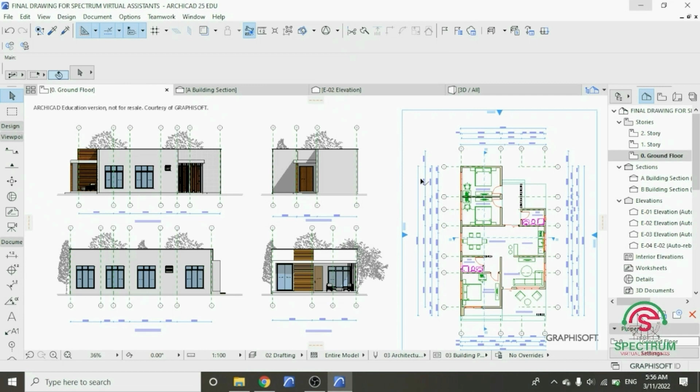Today, I'm going to show you how to draw this floor plan using ArchiCAD, and I'm going to begin with the first step, which is how to open a new project in ArchiCAD. Double click on the ArchiCAD icon, and this will appear at the top.

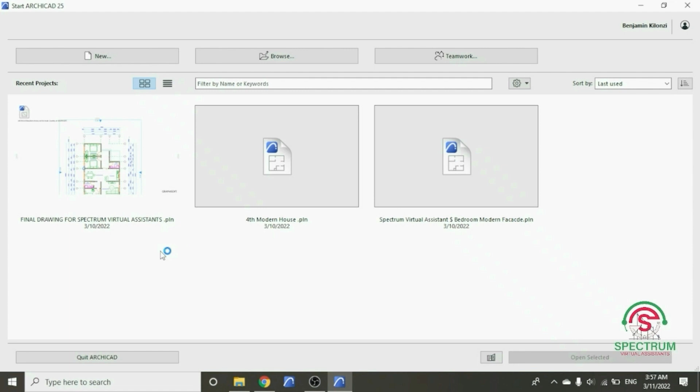Click on this part, click on New. Once you do that, this will appear. Under Template, select ArchiCAD 25 template. Under Work Environment Profile, select Default Profile and click on New. Once you do that, your workspace of the new project will appear.

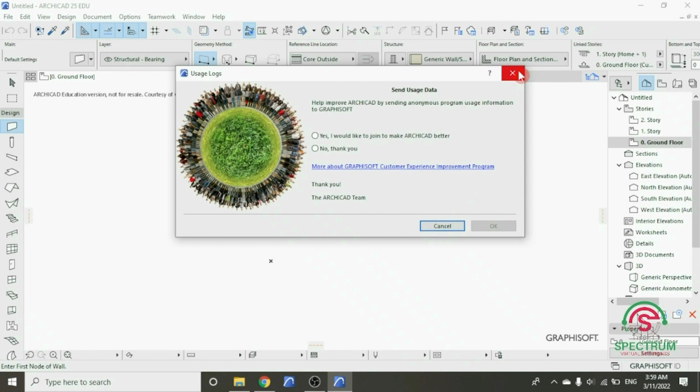Before we proceed, let's save our project and name it. Click on File, select Save As, and choose a folder to save your project in, and type in the name of your project. Once you're done typing in the name of your project, click on Save.

The next step you're going to do is enter settings for our new project. At the top, click on Options, drop down to Project Preferences, and select Working Units. Under Length Unit, select millimeter. You're going to choose 0 for the decimals. For the area unit, select square millimeter. The decimals, choose 0. The volume unit, select cubic meter.

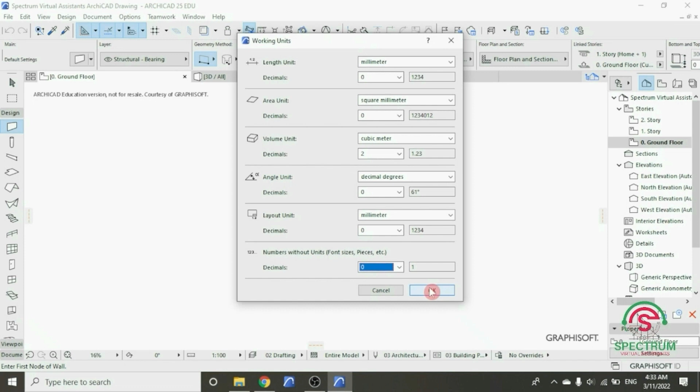For the angle unit, select that. Under layout unit, select millimeter. And for this, select 0 and click OK. Click on Options again. Drop down to Project Preferences and click on Dimensions. And this will pop up. Under Unit, select millimeter and for the decimals choose 0 and click OK.

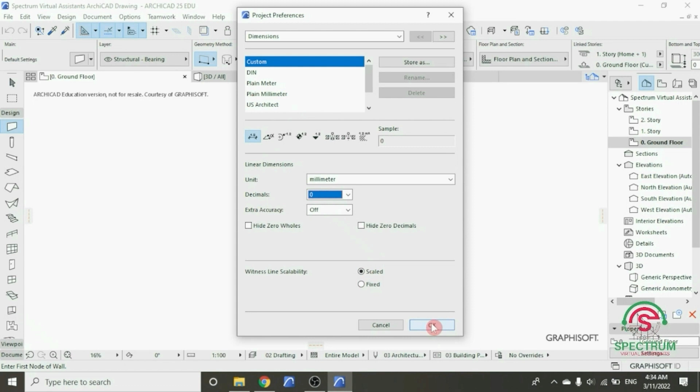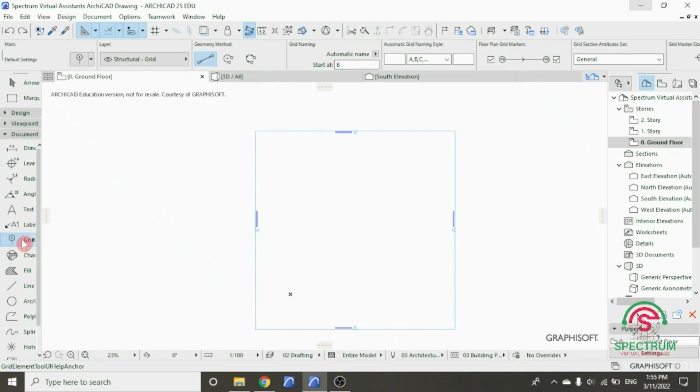Now the next step will be drawing grids of our new project. Under Documents, click on Document, drop down to Grid Element tool, double click on it, and this will pop up the Grid Element default settings. Let's begin by entering settings for the floor plan. Under this, select all stories.

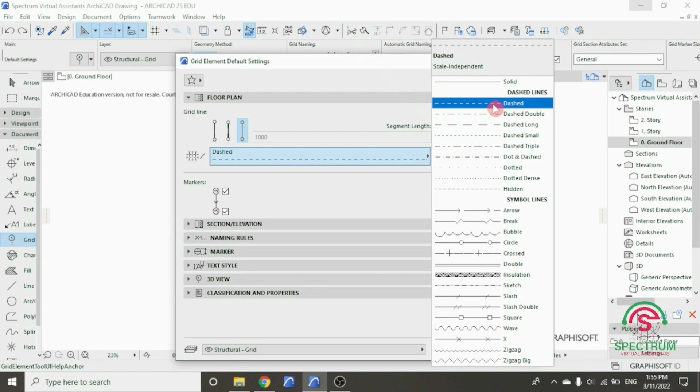For the grid line, select dashed line. Click on this part and select this color. For the markers, leave them as they are. And on this part, type 1000.

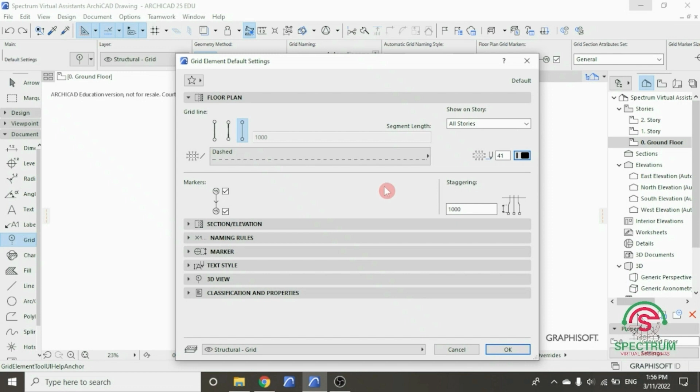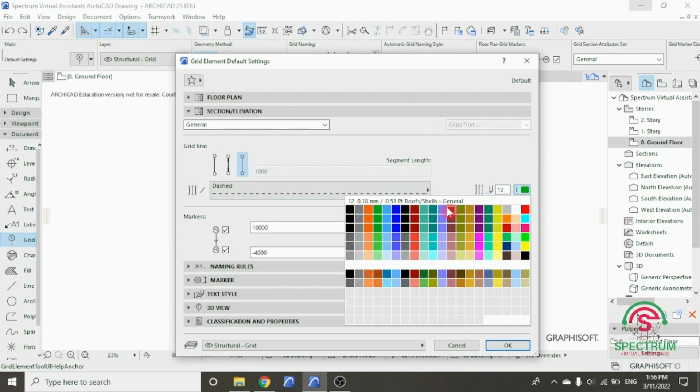Now let's enter settings for section and elevation. Click on General. For the grid line, select dashed and click on this color. For the markers, type 10000 millimeters, and for this type negative 4000 millimeters.

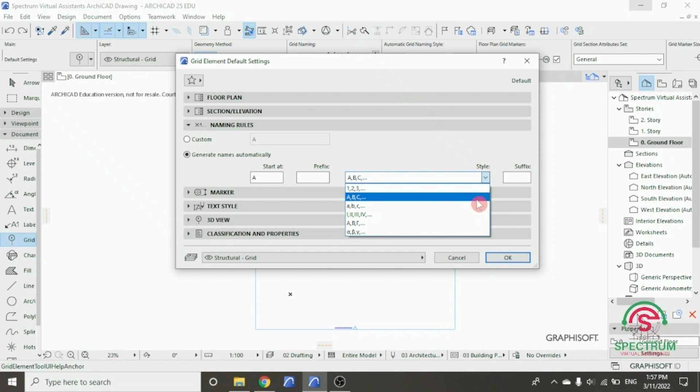Let's enter settings for naming rules. Click on Generate Names. Start at A, and for the style, choose this. For the marker settings, type 5 millimeters. For the marker pen, select that, and for the text pen, select that. For the marker shape, select circle.

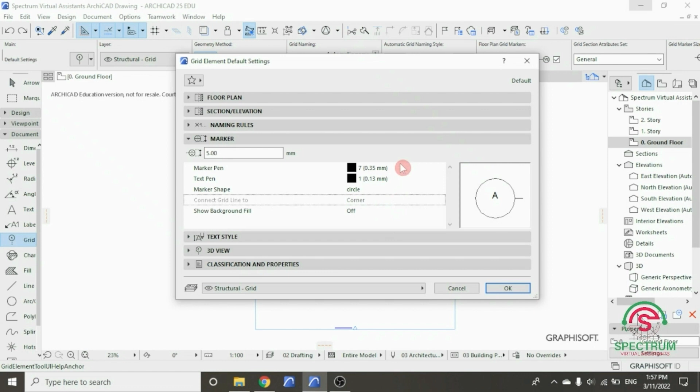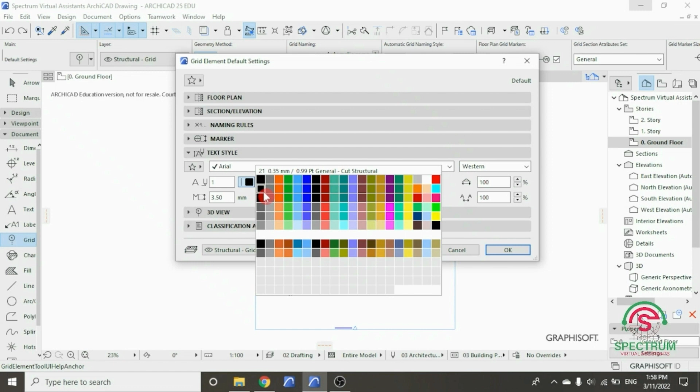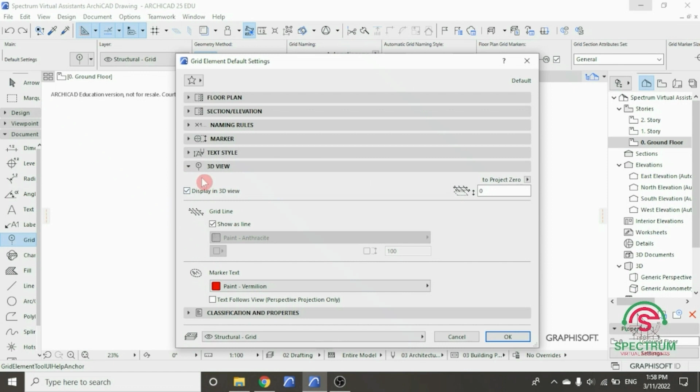Under text style, we are going to choose this style. Click on that, and for this, select that option and choose that. And here type 3.5 millimeters. Under 3D view, select that, type 0, check that box and choose this. Under classification and properties, these are the settings. Then click OK.

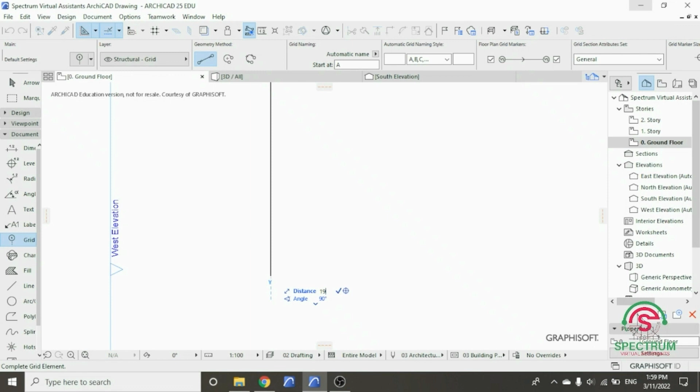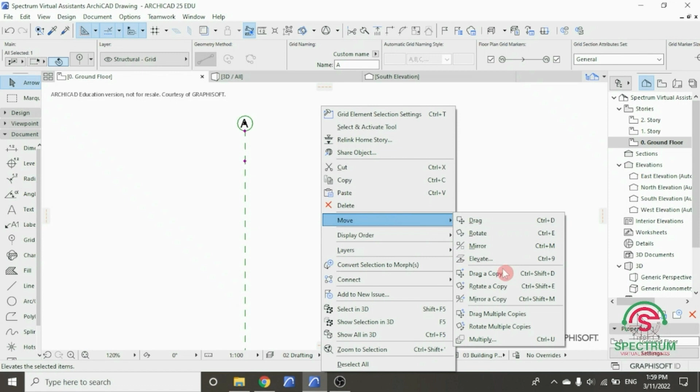Now let's begin drawing our grid line. Click on a point in workspace, drag your mouse and type in the length of your grid line. Type 19,700 millimeters. Let's drag a copy of our grid line. Click on it, right click, drop down to move and select drag a copy. Click on your grid line, drag your mouse and a copy of your grid line will be generated.

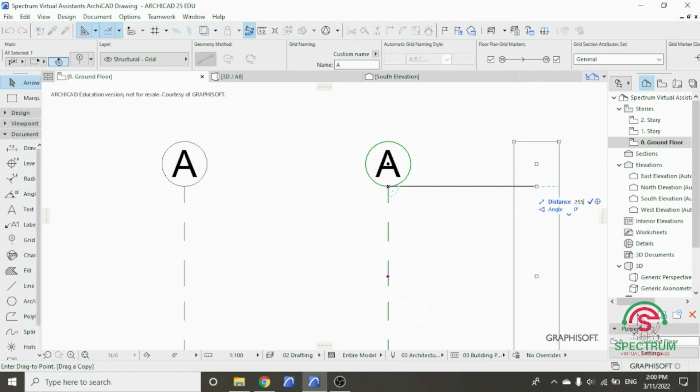Right click, select drag a copy and drag it by 2250 millimeters. Drag another copy and type the distance as 2550 millimeters. Drag another, let's name this grid line as B. Type C and then type D.

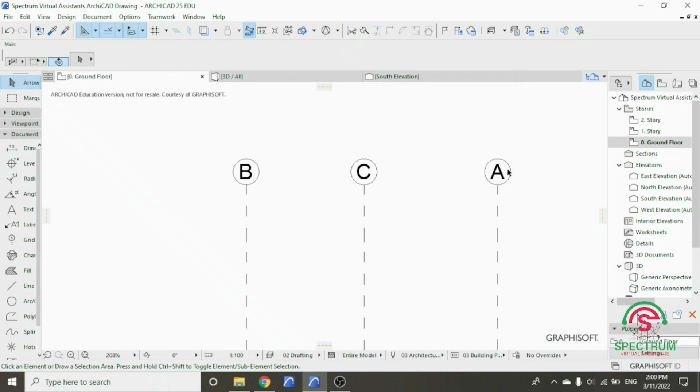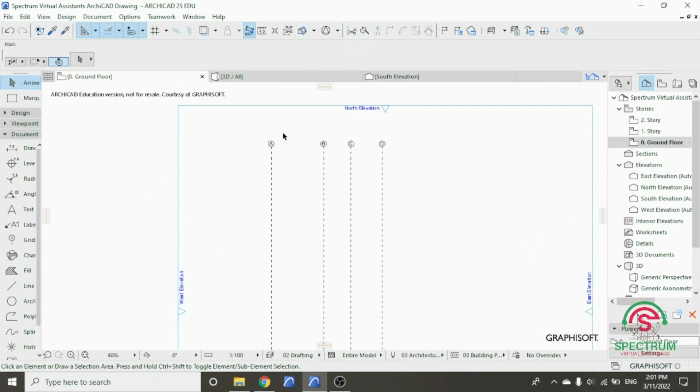Let's draw another grid line. Under Documents, under Document, drop down to Grid Element tool, click on it, click on a point in Workspace, drag your mouse and click on another point to end your grid line. Click on the grid line and name it 1.

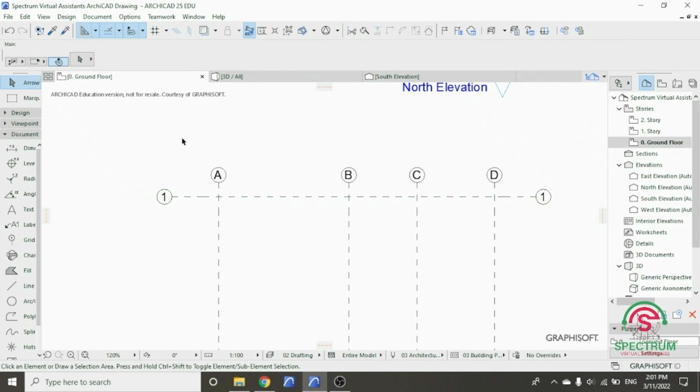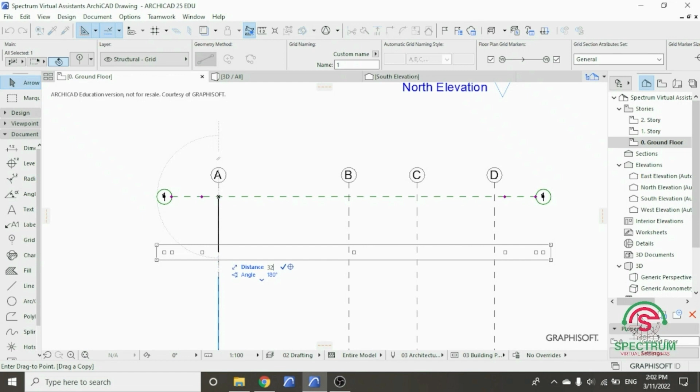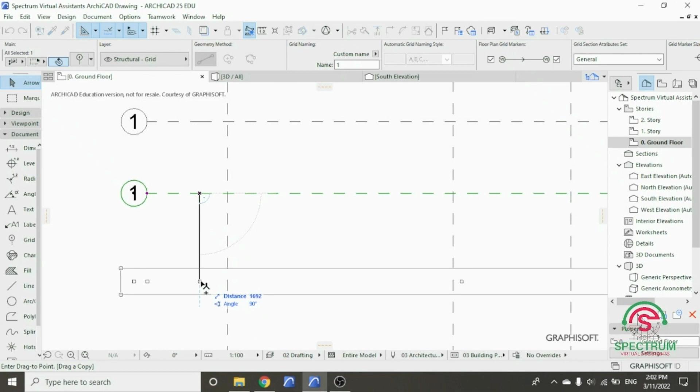Let's drag a copy of this grid line. Right click, click on move, click on drag a copy and drag it by typing in the distance 3275 millimeters. The other line, we're going to drag it by 1375 millimeters. Drag that line by 1775 millimeters.

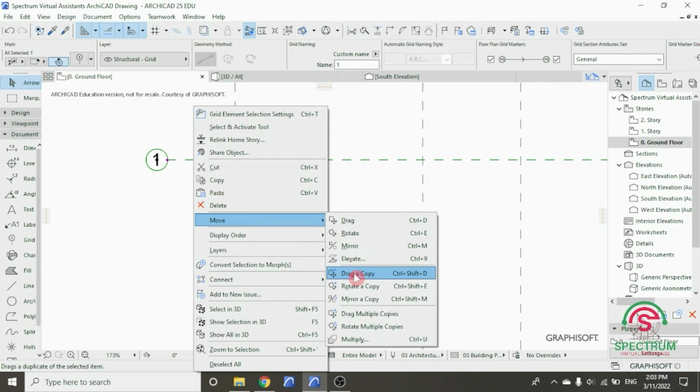For this other grid line, type 3350 millimeters. Drag a copy of this line and type the distance as 1800 millimeters. Drag another copy of this line and type in the distance as 1670. Drag another copy and type the distance as 2100 millimeters.

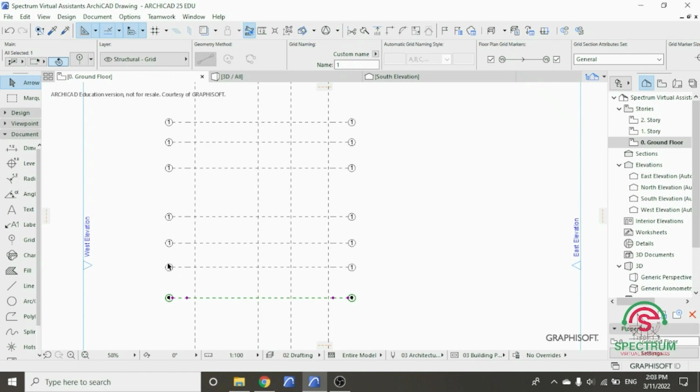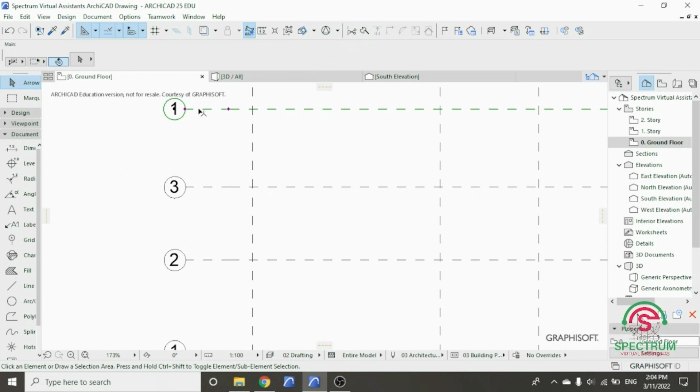Let's rename our grid lines. Click on the grid line and type 2. For the other one, type 3, type 4, type 5, 6, 7, and 8. And that's how you draw grid lines in ArchiCAD.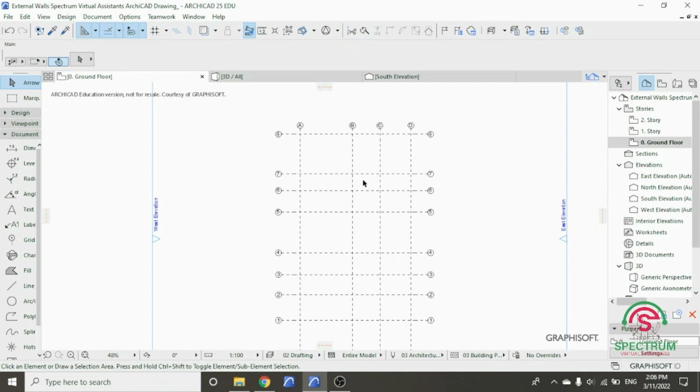In this next step, I'm going to show you how to draw walls. Under Design, double click on the Wall tool and the wall default settings will pop up. Under Geometry and Positioning settings, we are going to begin by entering settings for the top link. Select that, click on that, and type 200 millimeters.

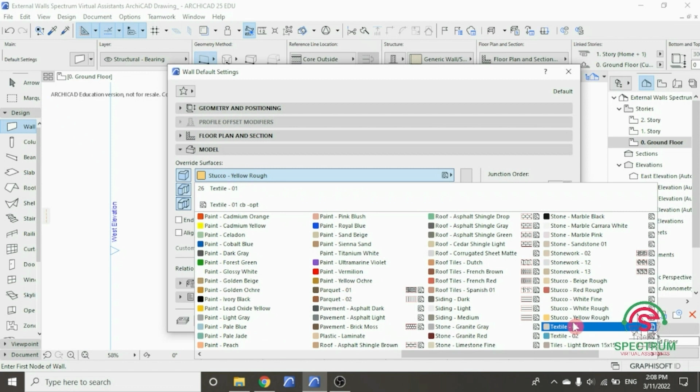Click on that option and click on that. Select 0, click on 0. For the home storey, select ground floor, which is the current. Under floor plan and section settings, you're going to enter the settings as shown on the screen. And for the model settings, you're going to enter settings for the override surfaces. Click on them, click on this part and select this option. For this other part of the surface, select this option, and for this, click on that option.

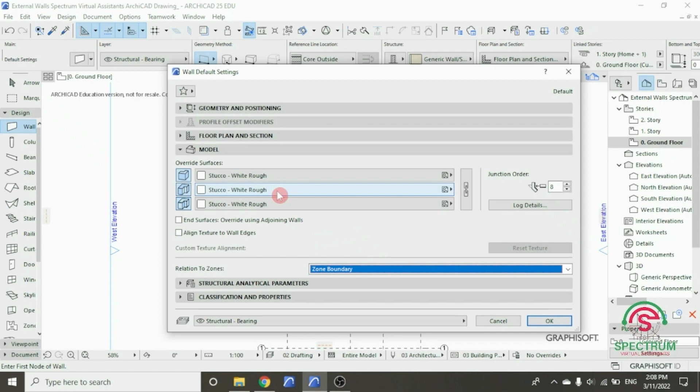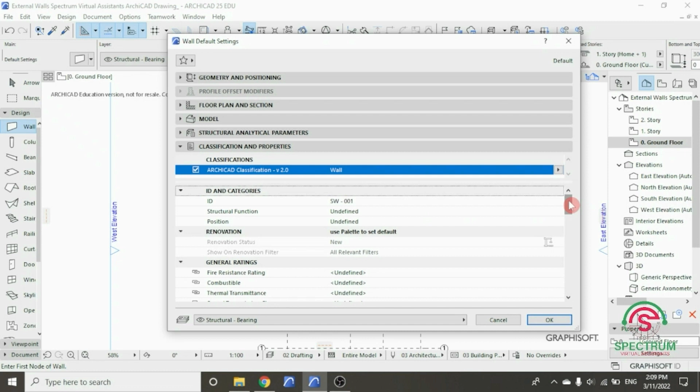Under Structural Analytical Parameters, you're going to enter the settings as shown on the screen. For the Classification and Properties settings, enter the settings as shown on the screen. Once you're done, click OK.

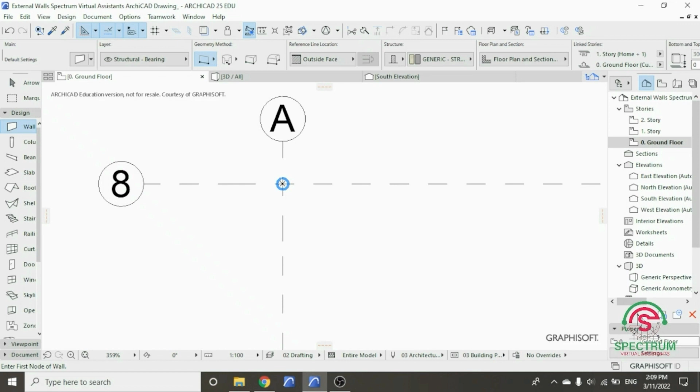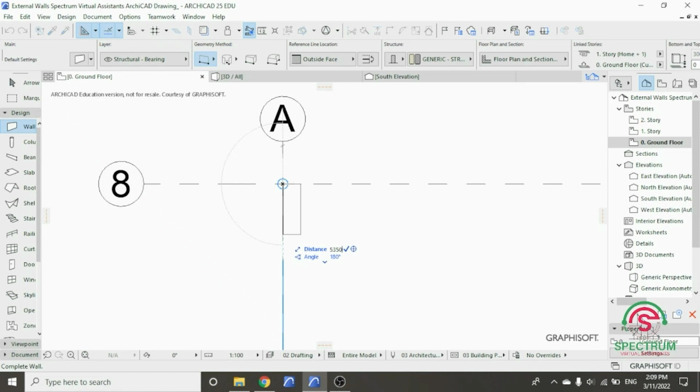Now let's begin drawing our external walls. Click on this part, drag your mouse and type the length of the wall. Type 15,350 millimeters. Enter. Click on the wall and drag it by 100 millimeters. Click on the wall, right click, click on Move and drag a copy from this point all the way to this point.

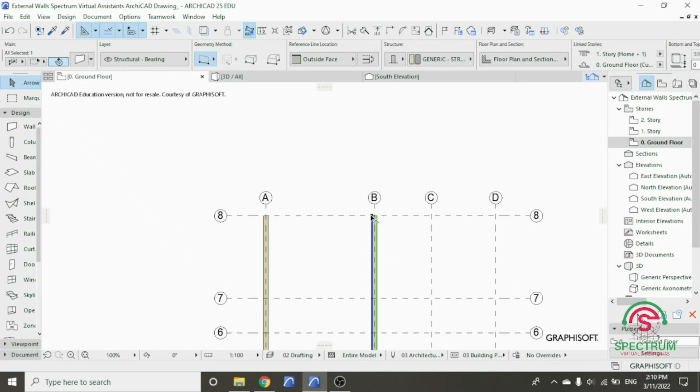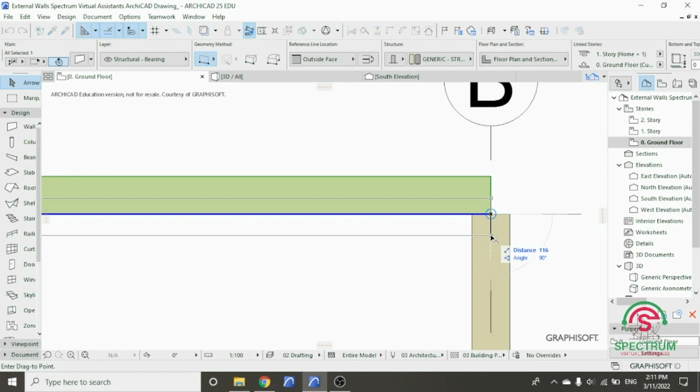Now let's draw the other part of the external wall. Click on wall, click on this point, drag your mouse and click on this point. Select that wall and drag it by 100 millimeters. Click on the three walls and at the top click on intersect, and the walls will be joined.

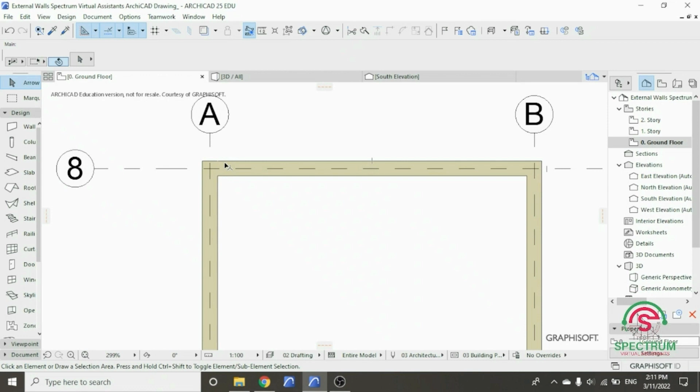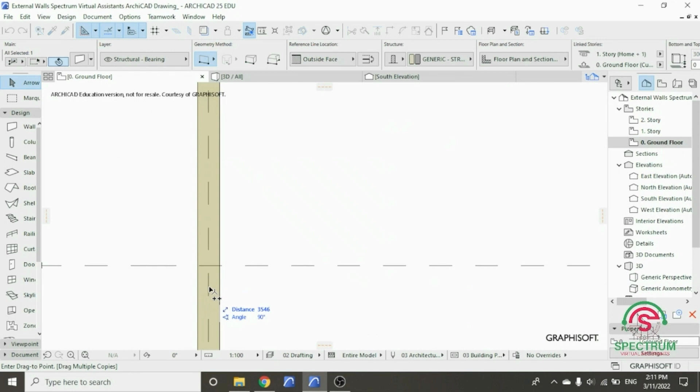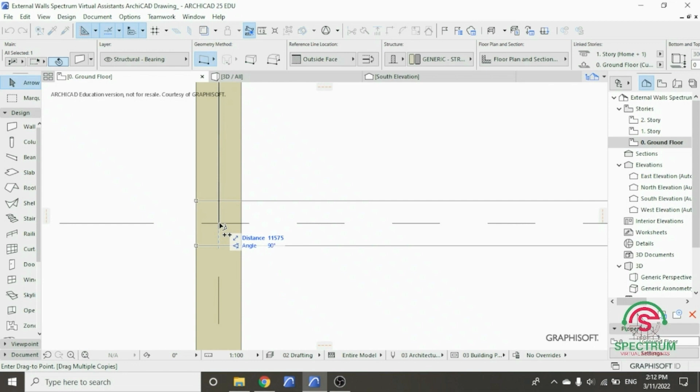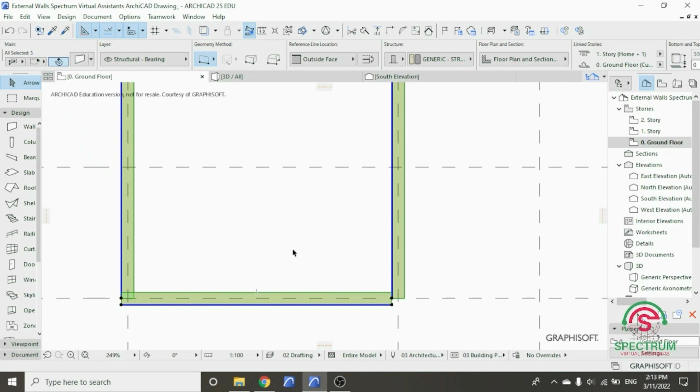Let's drag multiple copies of this wall. Click on this part of the wall and drag your mouse and click on this point. Click on this other point. Click on this. Click on this. Click on this part. Click on this one, and this at the top. Click on intersect.

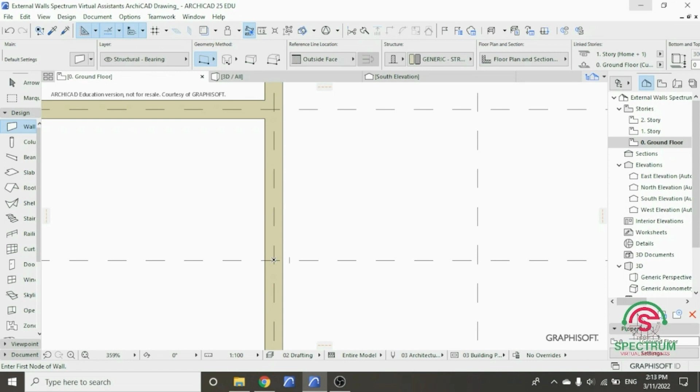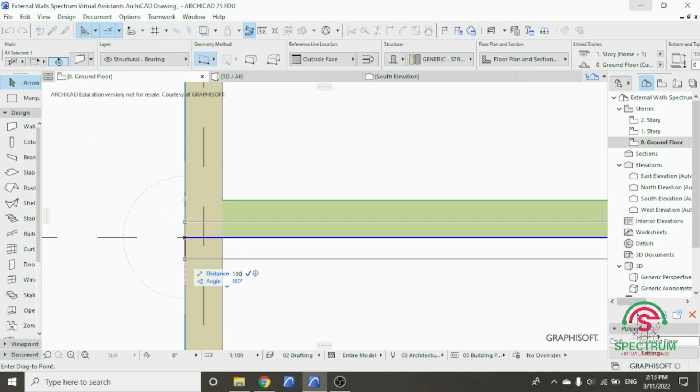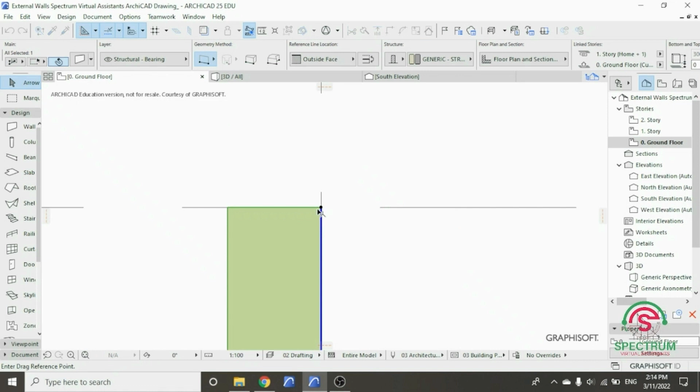Now let's draw the other part of the external wall. Click on wall tool. Click on this part. Drag your mouse and click on this part. Let's drag our wall. Right click, click on move and drag by 100 millimeters. Let's draw another wall from this point all the way to this other point. Drag that wall by 100.

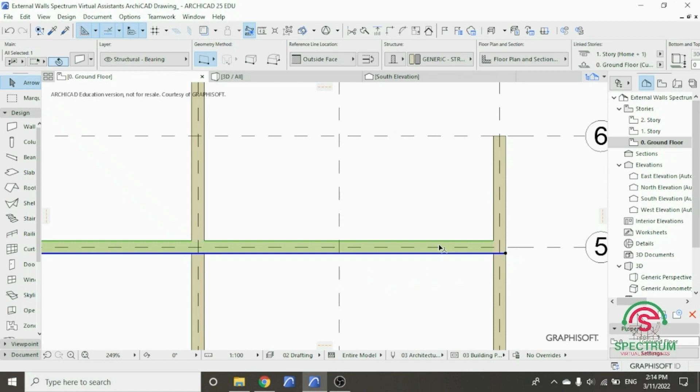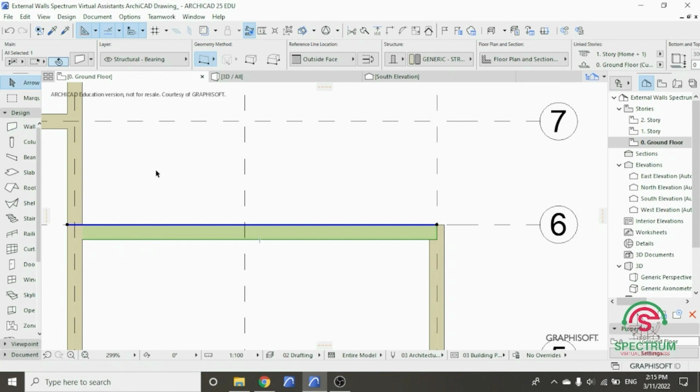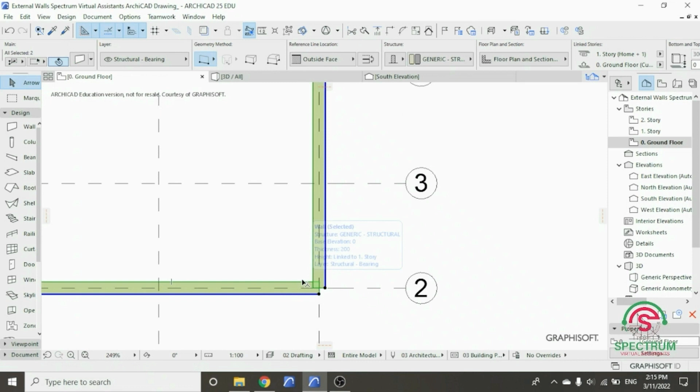Extend this wall all the way to this part. Click on wall. Drag your mouse to this part. Click on wall tool. Click on this part. Drag your mouse and click on the other part. Drag your wall by 100. Enter. Click on the tool and select intersect. At the bottom of this point, click on these two walls and click on intersect.

Click on wall tool, click on this part and drag your mouse and click on this other point. Drag your wall by 100. And that's how you draw external walls in ArchiCAD.

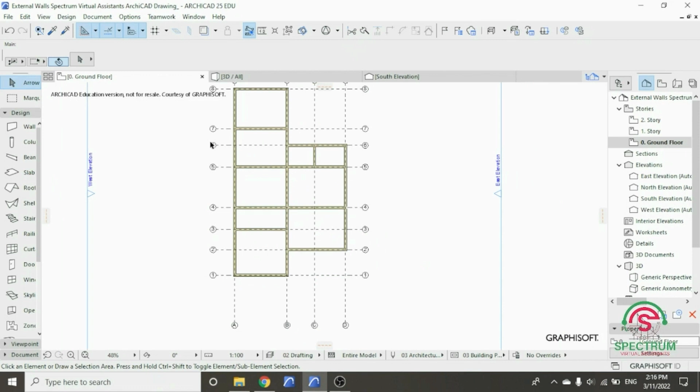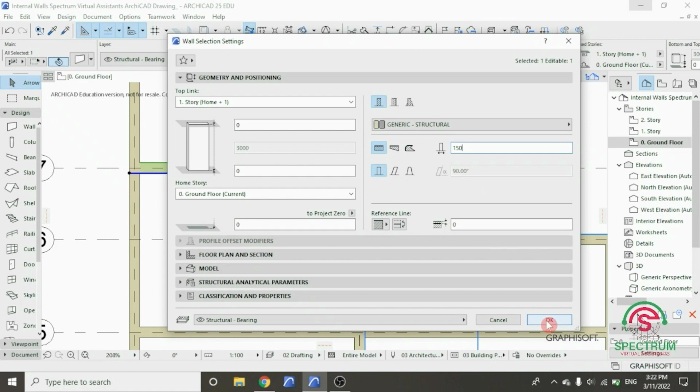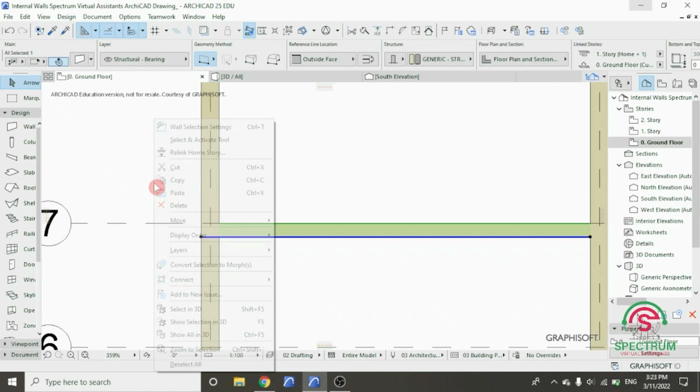Click on this wall, right click and select wall selection settings, and this will pop up. Type 150 millimeters and click OK. Drag your wall from this point to this other point. And then let's move our wall from this point by 75 millimeters.

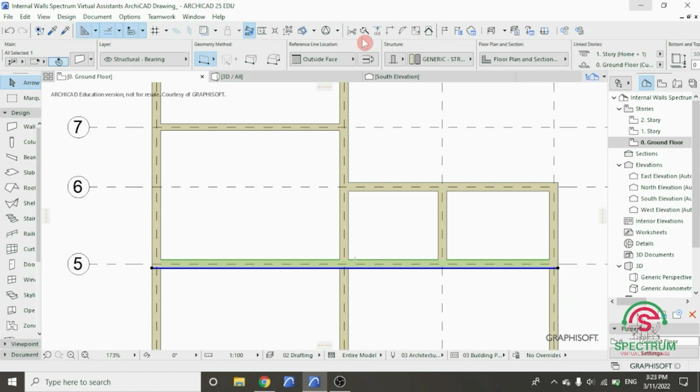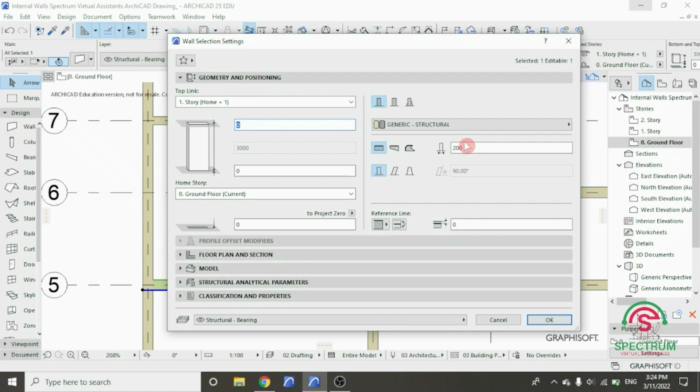Let's change the thickness of this wall. Click on it, but let's first split it. Click on this part. Click on this part of the wall. Drag your mouse and enter. Click on the wall. Right click. Select wall selection settings and type the thickness as 150 millimeters. Right click and move your wall from this point to this other point. Right click, drag it by 75 millimeters.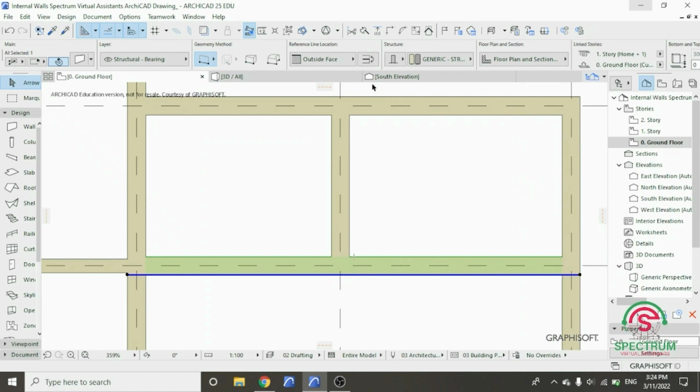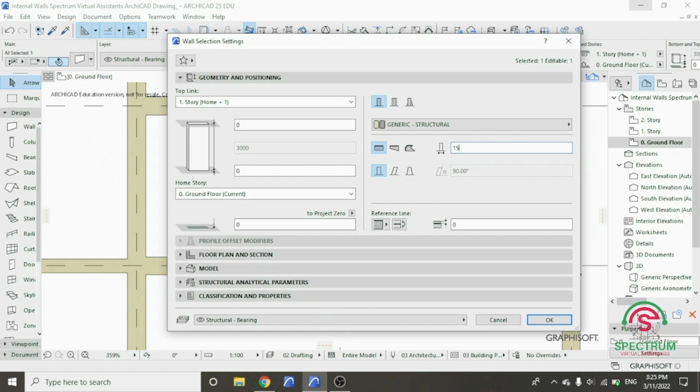Click on that wall, select split, click on this part of the wall, drag your mouse and split your wall and change the thickness to 150 millimeters and click OK. Move from this part to this other part and drag the wall by 75 millimeters. Click on that wall and select trim, and then click on that part of the wall to trim it.

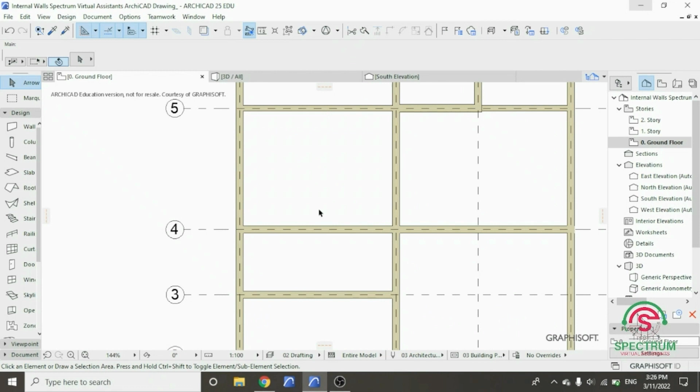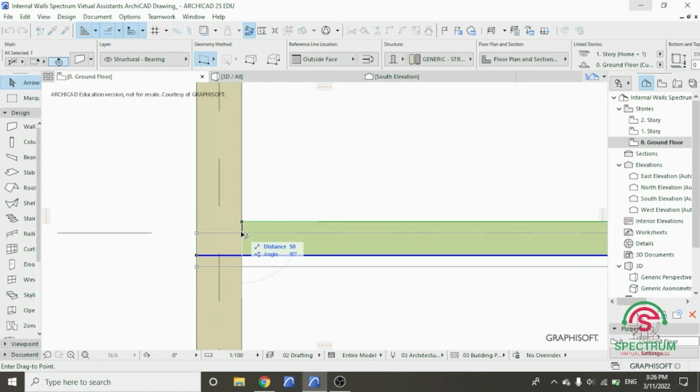Now let's change the thickness of that wall to 150 millimeters and move our wall from this point to that point, and then drag it from that point to that and type 75 millimeters.

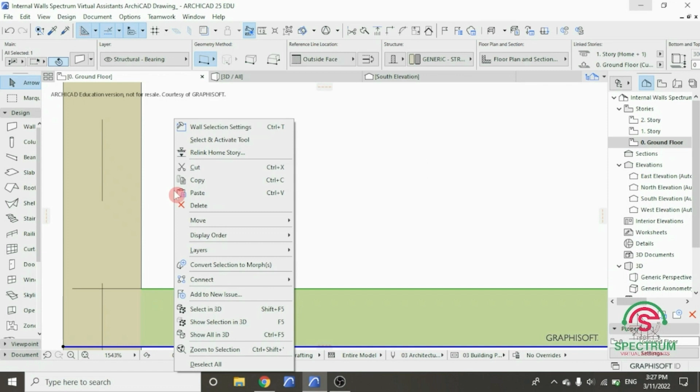Let's change the thickness of that wall and type the thickness of the wall as 150 millimeters. And then let's move it from this point to that. Right click, move and drag it by 75. Select the wall and click on trim, and then trim that part of the wall.

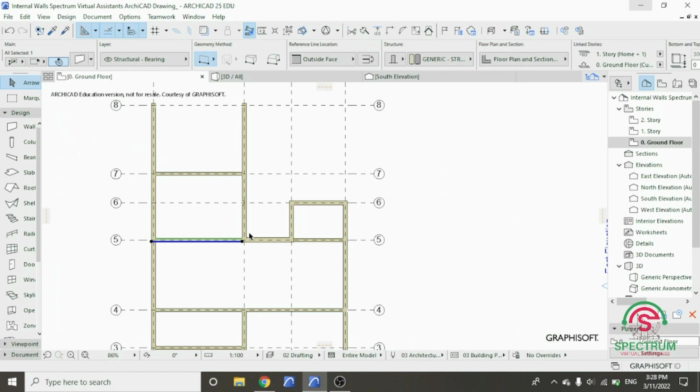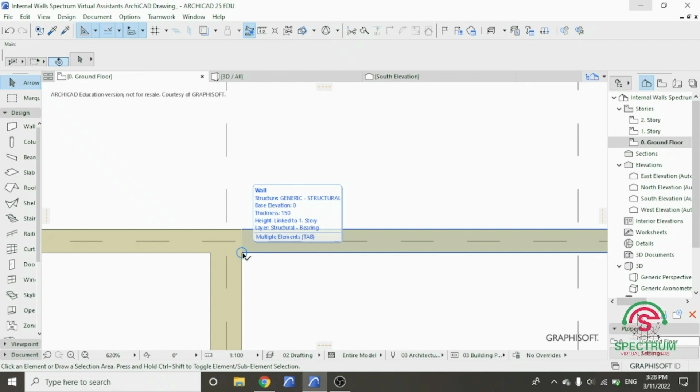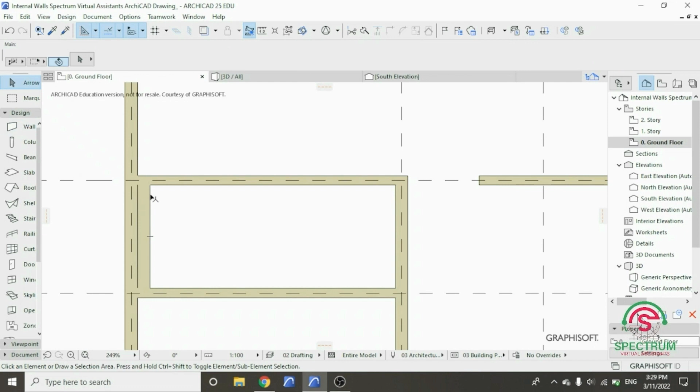Click on that part of the wall, drag your mouse up to that point, click on this part of the wall, those two walls, and intersect them. Click on that, click on wall, click on that part of the wall and draw a wall up to that point. Click on it, right click and drag a copy by 100.

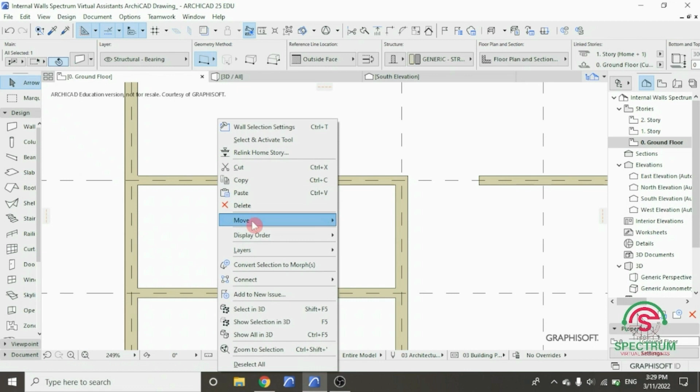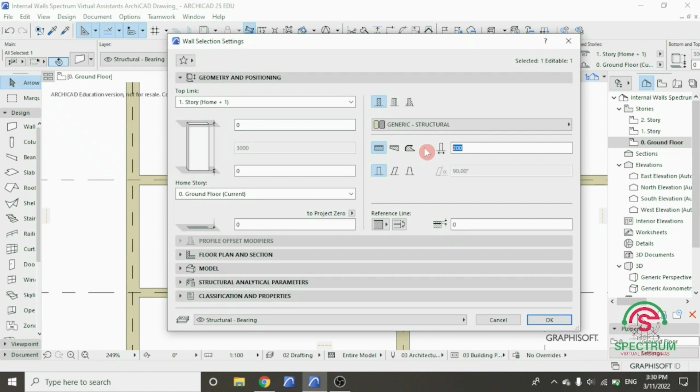Drag that copy by 1000 millimeters. Click on trim and trim that part of the wall. Click on the wall, right click, select wall selection settings and type 150 millimeters. And that's how you draw or change the thickness of internal walls in ArchiCAD.